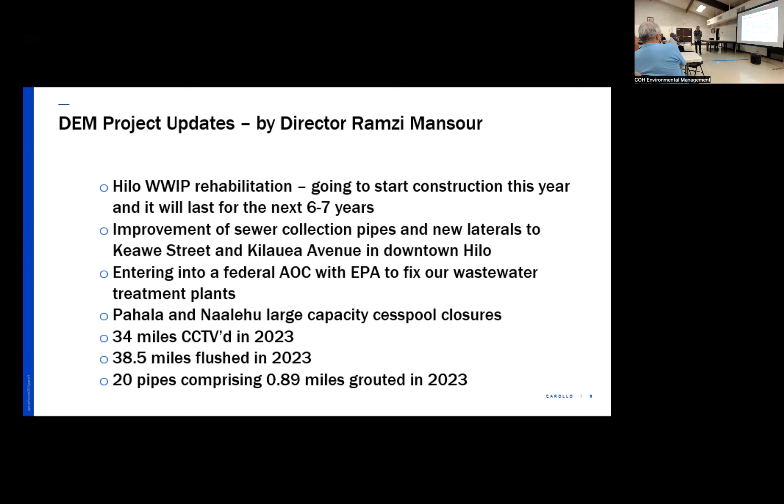Some of the projects on the west side: Kealakehe waste treatment plant is as big as Hilo, but Hilo's gonna get a full rehab. Kealakehe, we're doing a few projects as well. It's very time, staff, and financial consuming. We're working on some force main replacement down Ali'i Drive. Before I forget, Hilo facility also connects a force main, the PUA force main. That's also a major project. It's gonna be part of the Hilo rehab within 6 to 7 years to make sure all the wastewater gets pumped to the new treatment plant that crosses the current airport.

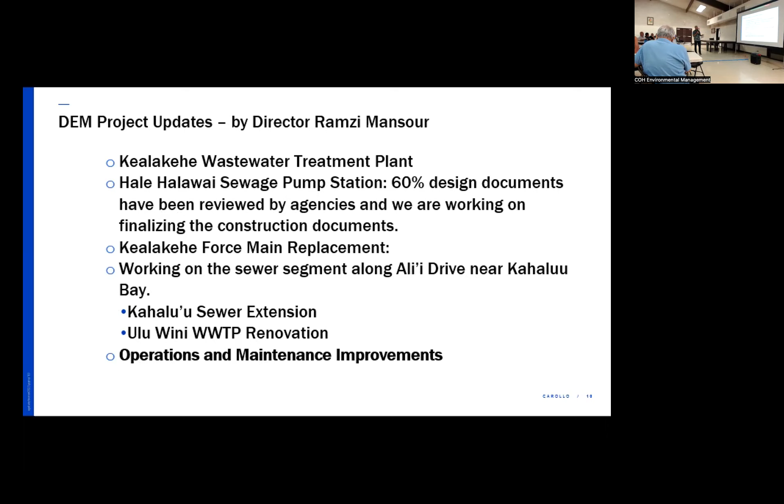Next slide, Carrie. This is the new 3-dimensional facility that's gonna be constructed over the next 6 to 7 years. We're gonna replace the major components you've seen in the prior slide that were corroded, non-functional infrastructure, with new infrastructure. Hopefully we'll have new digesters, these circular ones. These are the new digesters that we're gonna have, it's gonna be bid out in April.

We're gonna have new infrastructure, a new structure of buildings that's gonna house all the mechanical equipment to provide treatment for these digesters. And we have the solids control building, which is the biggest building you see there. That will take the sludge out of these digesters and dry it out, and potentially that sludge could become compost, but we need to team up with other vendors to see how we could capture that sludge.

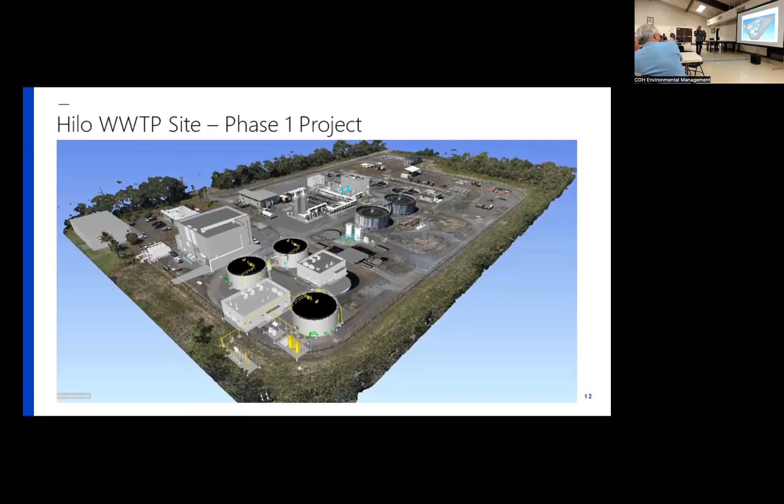So with that, I'll hand it to our consultant. She's doing the cesspool conversion plan study, the integrated wastewater management plan. These two plans will give us a roadmap for the entire county to be able to plan ahead. From these two plans, we could extract policies and procedures that could assist and help our communities. With that, I'll turn it to Dr. Ishida.

Thank you, Ramzi. Please call me Carrie. My name's Carrie.

So on this slide here, we wanted some clarity. There are different parties involved in this issue besides homeowners. What makes this issue especially messy, no pun intended, is that it depends on how your cesspool will be converted as far as whose jurisdiction it falls within. The other parties involved are the Hawaii Department of Health, besides the county, and the homeowners. We will have Jonathan Nagato from the Department of Health Wastewater Branch online for the Q&A at the end of our presentation.

The Hawaii Department of Health Wastewater Branch is in charge of reviewing and approving new individual wastewater systems at the household level—cesspools, septic tanks, aerobic treatment units. They regulate and oversee all of these individual wastewater systems, or IWSs. They also implement financial aid related to individual wastewater systems.

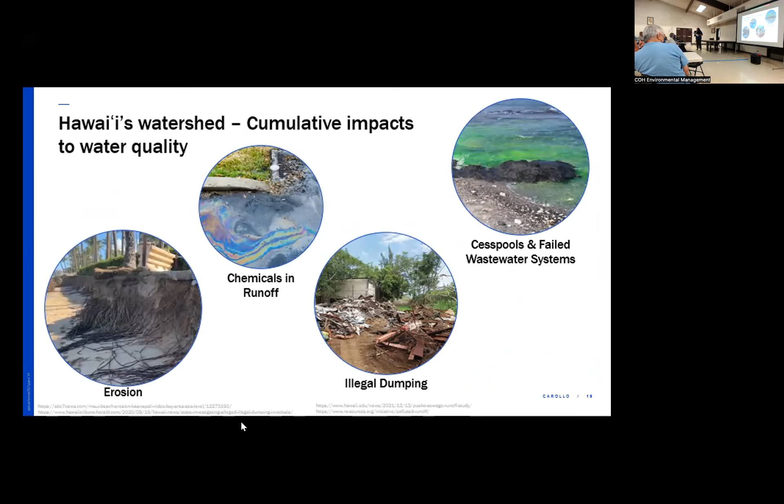We also understand that there are cumulative impacts to water quality, including erosion driven by climate change, chemicals in stormwater runoff, and illegal dumping of both liquid and solid waste. Cesspools and failed wastewater systems contribute to the health of our waters. Fortunately, this is one thing we have control over. If we can collectively get a handle on the situation, we can together make a big impact on our environment.

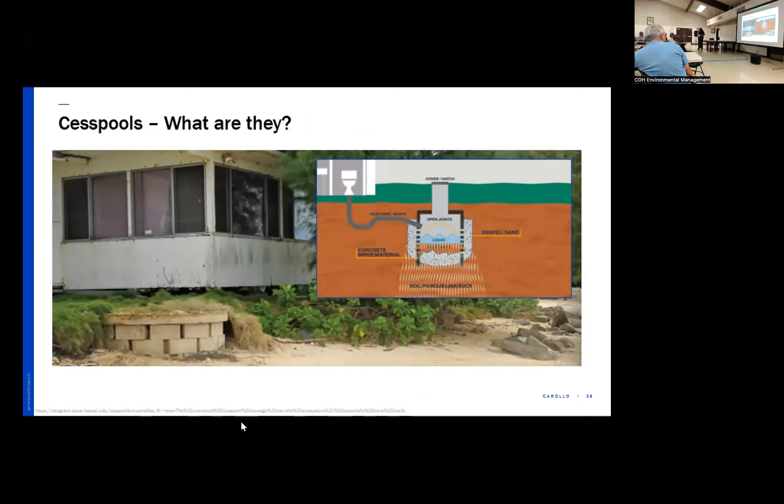So what are cesspools? As many of you know, they are really just an unlined hole in the ground. There's no barrier between what is in there and the surrounding environment. So gravity will conduct its natural process, and that material will work its way down, often into our groundwater and then sometimes to our rivers and out to our nearshore waters.

So the impacts are many, unfortunately. Cesspools are every day having an impact on our water resources, which include human health impacts such as gastrointestinal illnesses and skin infections, which I'm sure you folks are familiar with in surfers and paddlers. They also impact our drinking water, and this is significant because over 90% of our drinking water comes from groundwater sources, which can be contaminated by cesspools. They also have environmental impacts, as they can increase nutrients in the water, which can lead to algal blooms impacting our fish and our limu. And they impact our recreation, as well as our ability to fish and swim in these waters, and the overall health of the community, our environment, and in turn our economy and our unique Hawaiian culture.

So this slide gives a little bit of an idea about the problem we have with cesspools. In total, we have about 88,000 cesspools statewide that are impacting our environment every day, discharging about 53 million gallons of untreated raw sewage into our environment. And the very sad thing is that almost half of those cesspools are here on Hawai'i Island. The reason for that is because you could fit all the other islands of Hawaii into Hawai'i Island and still have space. So the sad truth is that this is a very difficult situation for the whole state, but it is more difficult here, where we need to come together to take action.

The legislature recognized this in 2017 and passed Act 125, which banned the further creation of cesspools and required that those cesspools be upgraded by 2050. This is probably in recognition of our drinking water resources, which can be contaminated by cesspool waste, and in fact have been contaminated in some areas. Studies have shown nutrients popping up in areas where there are domestic wells where that water is being used.

So how can you help? First of all, thank you so much for being here. This is the big first step into turning the corner on this issue. You can also do other things to support the health of our resources, including composting or properly disposing of your food waste, picking up after pet waste, which again leads to nutrients in our nearshore waters, dropping off toxic chemicals at a disposal center, avoiding chemical fertilizers and using natural products instead, conserving water, and most importantly, replacing your cesspool with a more reliable wastewater infrastructure that can make a much bigger difference for our environment.

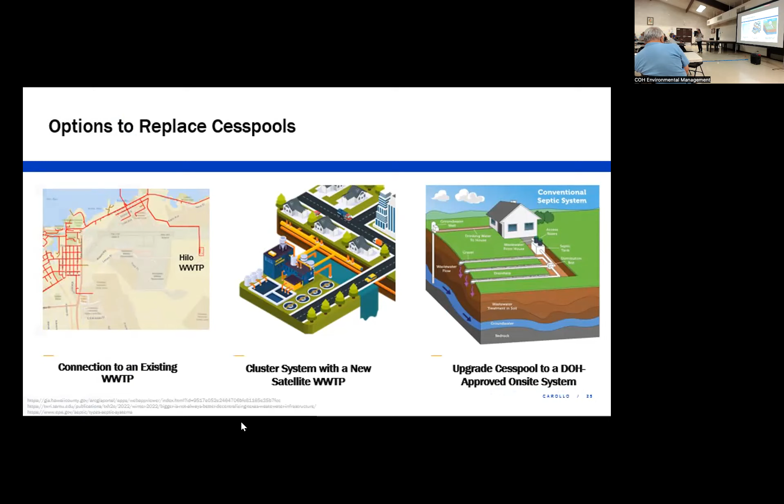So conversion option number 1, connecting to the county's or an existing sewer system. Another term for it is centralized system.

Some of the considerations are your proximity to the existing collection system or a future collection system if the county is going to extend their system. So they need to think about the feasibility of extending their system.

The county is also taking into account through this plan the available capacity at their wastewater treatment plants. So what additional flows, how many other cesspools can be connected to their system that can be handled by their plant. And then, of course, costs.

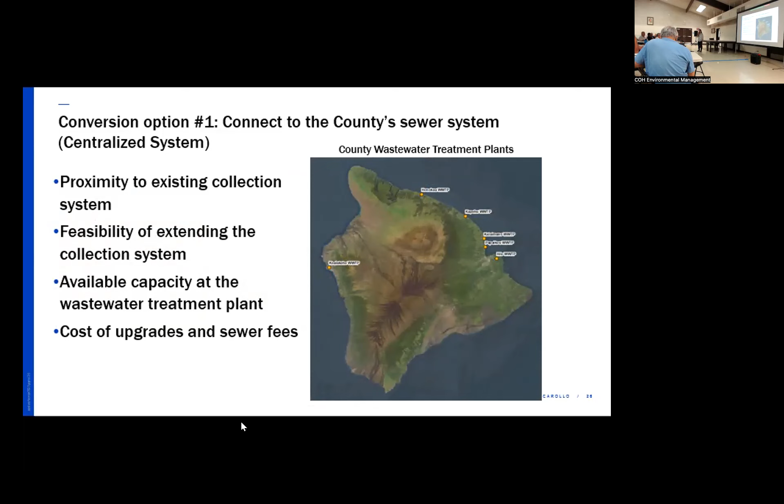There are costs to build the new sewers, costs to upgrade plants if it's needed, and that can have impacts to the sewer fees. And I should have pointed out the graphic to the right, there is a map of the existing county wastewater treatment plants. So if you can think about your location relative to those, that'll give you a hint as well.

So let's talk about the benefits and challenges of this conversion option of connecting to the county sewer system. The benefits are there's potential to reduce potable water use and increase recycled water use if recycled water is an end use at the centralized wastewater treatment plant.

There's also excellent environmental protection. County's wastewater treatment plants and system is heavily regulated by the Hawaii Department of Health as well as the Federal Environmental Protection Agency. There's also the potential for rapid conversions.

So if the county can extend their sewer system, pick up whole blocks, whole neighborhoods, it's possible to connect many cesspools. Also, as a homeowner, you will not have to operate and maintain your own mini wastewater treatment system, which you would have to do if it's an individual system.

And then lastly, there's the potential to reduce the burden of the scope to the homeowner so that you're only responsible for your sewer lateral. So you would just connect to the county sewer.

Some of the challenges of this option is the county would need to expand their sewer system. And there are costs to that, which can be significant. We'll talk a little bit more about costs later. But it is possible to finance and recover those costs over time, the county, as that is.

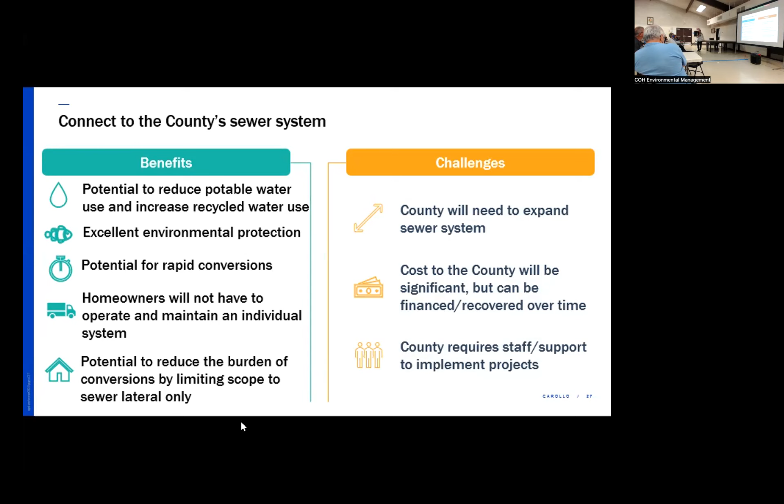The second option is connecting to a new or existing decentralized or cluster wastewater treatment plant. So this is the medium scale option. This type of conversion is connecting a group of homes. Just for conversation's sake, we'll say it's about 50 to several hundred. There's just a certain size where it makes sense to build such a system.

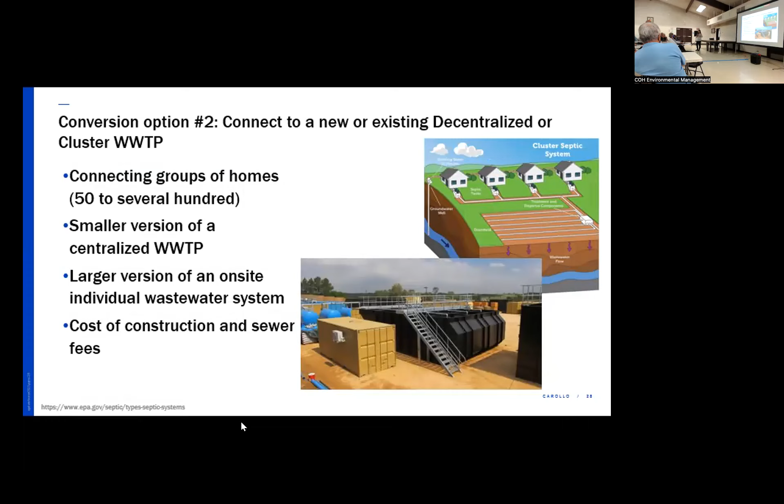It's a smaller version of a centralized wastewater treatment plant, but a larger version of an on-site or individual wastewater system. And some of the considerations are the cost of construction and sewer fees. And so for this option, you still need collection, treatment, and disposal.

So some of the benefits and challenges of this option. Again, you have that potential to reduce potable water use and increase recycled water. So you can treat the water to a very high level where it's safe to reuse for certain purposes that is also highly regulated, excellent environmental protection, highly regulated system.

Again, there's the potential for rapid conversions. You can pick up, and you can convert cesspools from a whole block. And homeowners will not have to operate and maintain your own wastewater system.

Similar to the previous option, there's the potential to reduce the scope and the burden to homeowners. All that you're responsible for is building that sewer lateral. And this option can broaden the range of funding opportunities for a decentralized system.

Some of the challenges are you need to get your whole neighborhood on board. You want all your neighbors, everyone that has a cesspool that's nearby, has to be on board with the solution for it to make sense.

There are costs for planning, designing, permitting, all the environmental studies that need to be done for a new system such as this. And there's also a need for licensed and skilled operators. So once you have a new plant, you need the licensed operators to operate that plant so you don't have to.

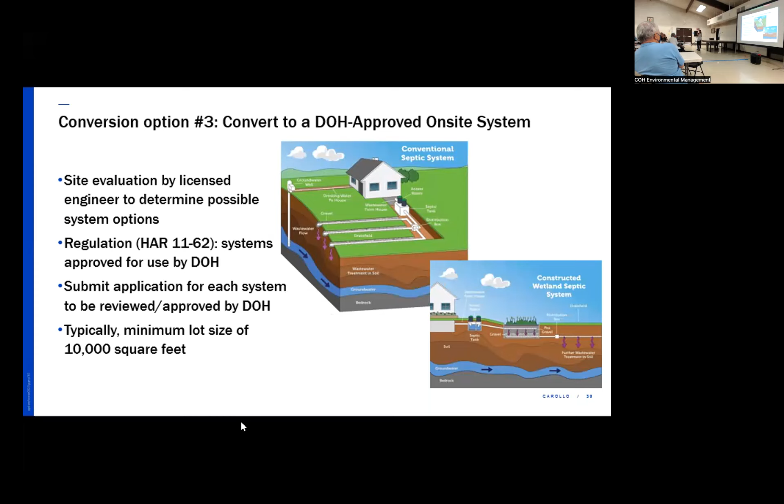Some of the benefits and challenges of an on-site or individual wastewater system: potentially lower construction costs. It's better than cesspools, not a whole lot depending on the technologies you use, and it might depend on your proximity to sensitive waters, near shore areas, and drinking water sources. You might still need a high level of treatment depending on your location. Another benefit is you don't have to get additional land as long as you can fit it all on your lot, unlike the other two options. There are relatively fewer permitting requirements compared to the other options, and as a homeowner, you can demonstrate your environmental stewardship.

Some of the challenges are that you as a homeowner are responsible for operating and maintaining your own mini wastewater system on your lot, and the costs must be borne by the homeowner. Financial support is needed by many for this option. Owners still must hire a licensed engineer to design the system, and a contractor. There is environmental risk because the effluent is directly discharged into the ground, and it is still a regulated system by the Department of Health, but it's just a different level of risk.

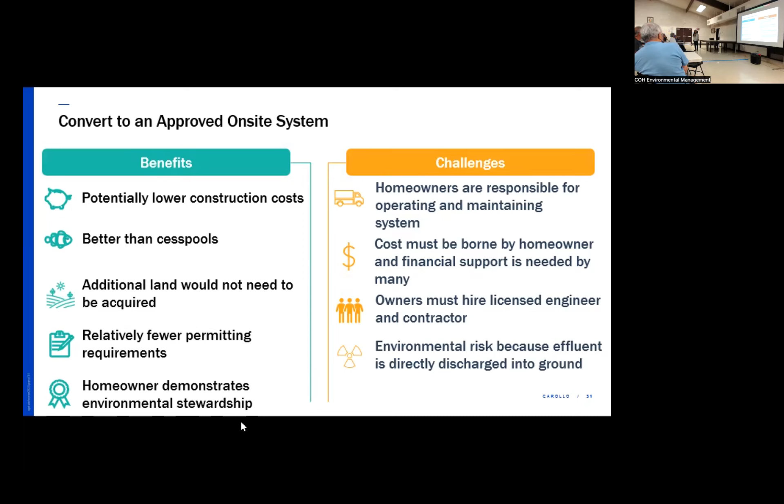There are future plans for financial support. We'll talk about ways you can get involved to help push that forward as well. Hawaii County is exploring grant and low interest loan options for county projects - that's what they can control right now. They're looking at federal funding opportunities and prioritizing high priority cesspools and those that are financially burdened. There are also state financial support programs - we expect to have Department of Health on the line for Q&A to talk more about that. There is a wait list that was filled for a current $20,000 Department of Health grant program, they rolled that out last year. There are other programs to be determined, and we'll share a little bit more about what we know about bills in the current legislature.